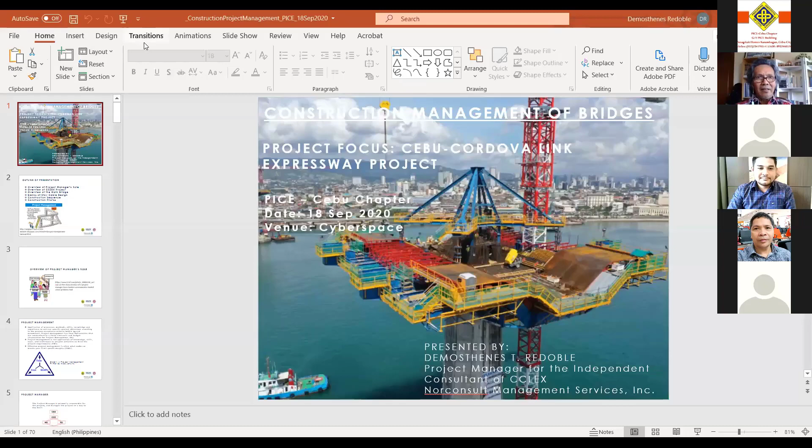Okay, so I have until 3 p.m. for my presentation, so I'll just time myself. Give me a few minutes. Sometimes when you enjoy talking you forget the time, and then the next speaker gets cut short. I'm also a friend of Mr. Fritz.

Okay, that's it. So in my previous presentation to civil engineering students, it went on too long, so I don't want to repeat the same mistake. Okay, there you go.

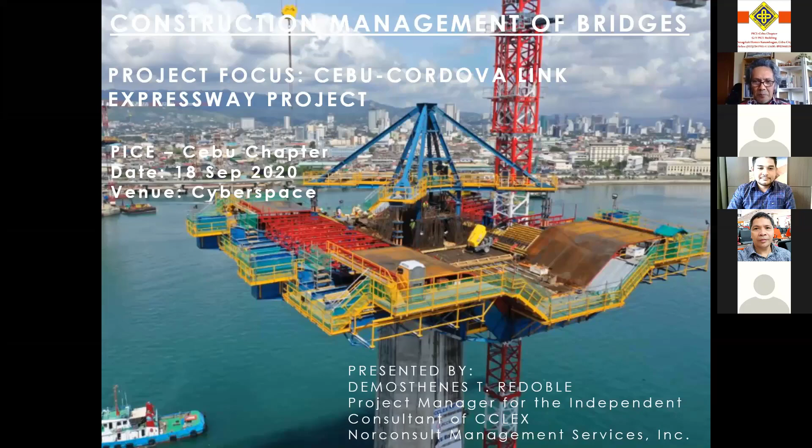So the next few slides will highlight what's going on at the Cebu-Cordova Link Expressway project. This is the overview of my presentation. First, I'll discuss the overview of the project manager's role, then the overview of the CCLEX project, then the overview of the main bridge, and then the basics of stay cable design. This structure is not taught in the academy, so I think everybody would welcome a few basic principles of cable stay design. Then the construction sequence of CCLEX, and then construction photos.

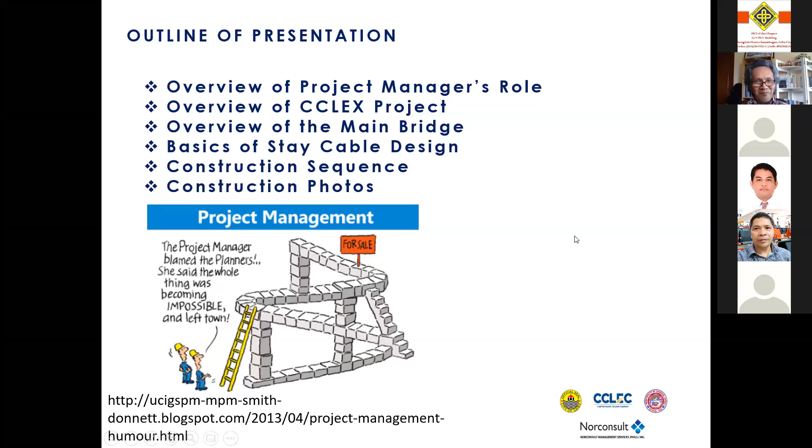By the way, thank you very much, Ma'am Edena, for your introduction. So the next few slides will be the overview of the project manager's role.

Let me read the definition of the role of a project manager from three certifying bodies: the Association for Project Management based in the UK, the Project Management Institute based in the US, and PSMJ, also based in the US. From the UK: application of processes, methods, skills, knowledge, and experience to achieve specific project objectives according to the project acceptance criteria within agreed parameters. Project management has final deliverables constrained to a finite time scale and budget. As a project manager, you do not deliver more, you do not deliver less—you deliver what is required within the timeline and within the agreed budget. From PMI: project management is the application of knowledge, skills, tools, and techniques to project activities to meet the project requirements—basically the same definition as the UK group.

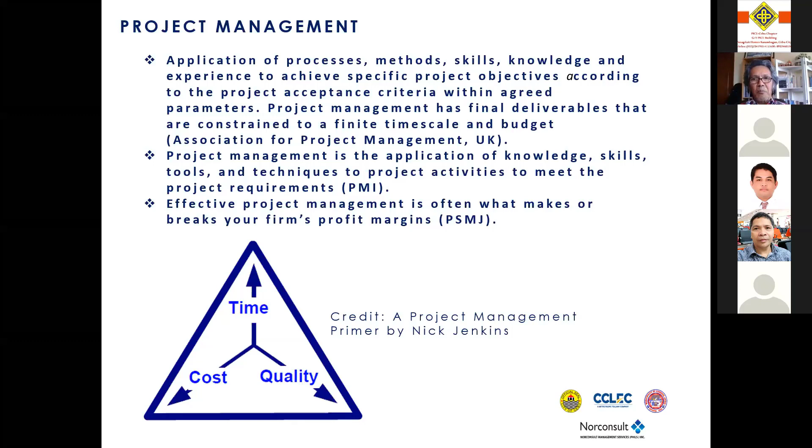If you are interested to pursue project management in the civil engineering profession, you have to go through some certifying bodies to make yourself marketable. So PICE has a certifying body.

To my recollection, we have four in the PICE group: structural, water, construction, as well as project management. I'm not sure if there have been changes, but I'm quite sure project management is one of those. So you approach PICE, disclose that you want to be certified, and probably you will have requirements the same way as a certified structural engineer.

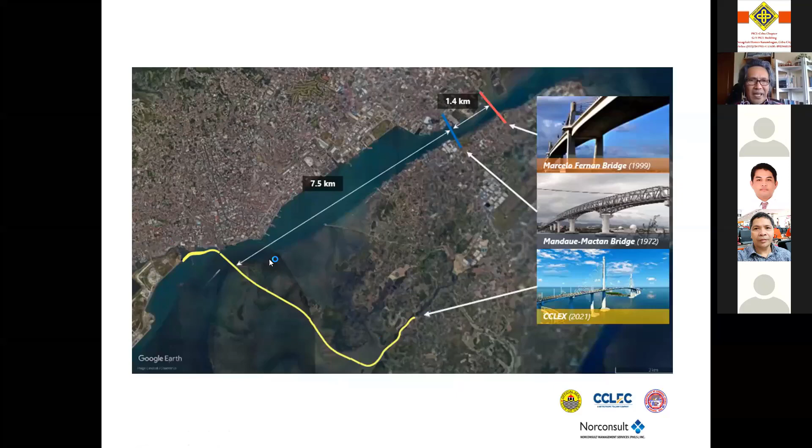I will not waste time on this one because time is very important. It might be good to summarize the lengths.

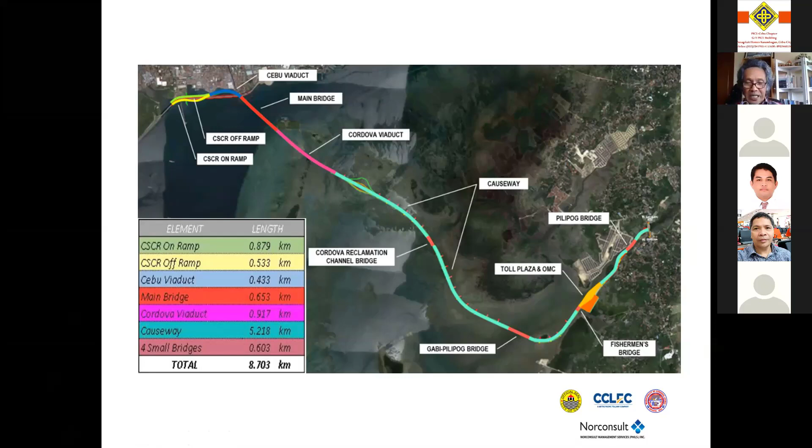By the way, the basis of calculating the toll is the length of the project, and that has been agreed by the LGUs and CCLEX. These are the iconic features of the third bridge.

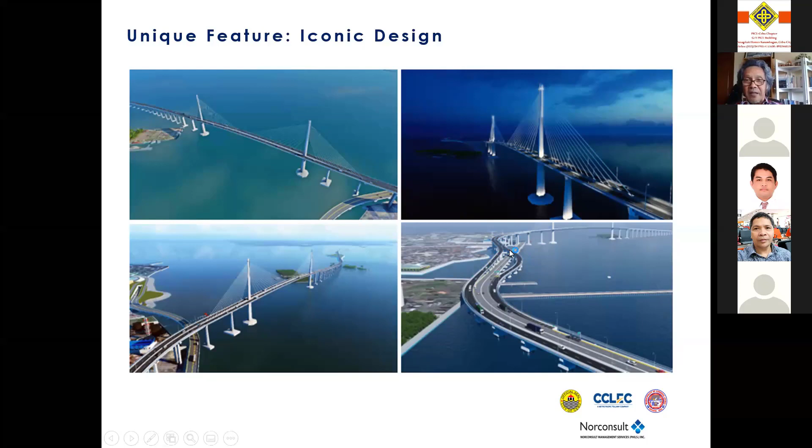So I think my pace is not so slow and I hope it's not so fast. I want to cover as much as possible.

One of the unique features of this bridge is an illuminated cross. Again, because Cebu is the birthplace of Christianity in the southeast, this is emphasized as part of the branding. So at night you will see the illuminated cross.

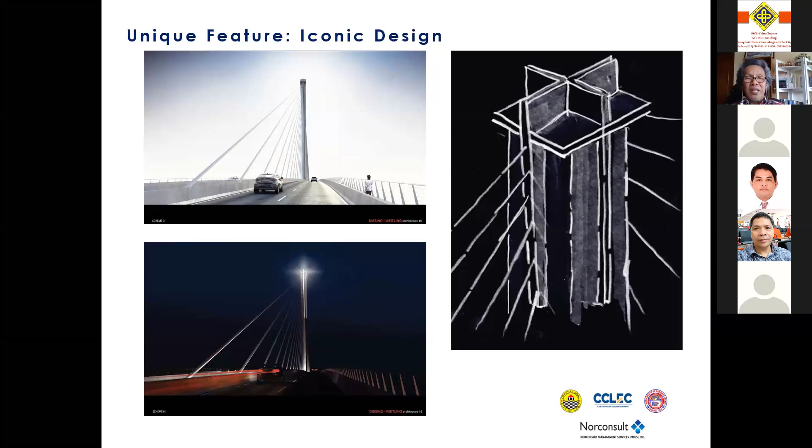One of the unique features of this project is the use of international design standards. I think this is always needed in all big projects, especially when our main reference is lacking to cover all aspects.

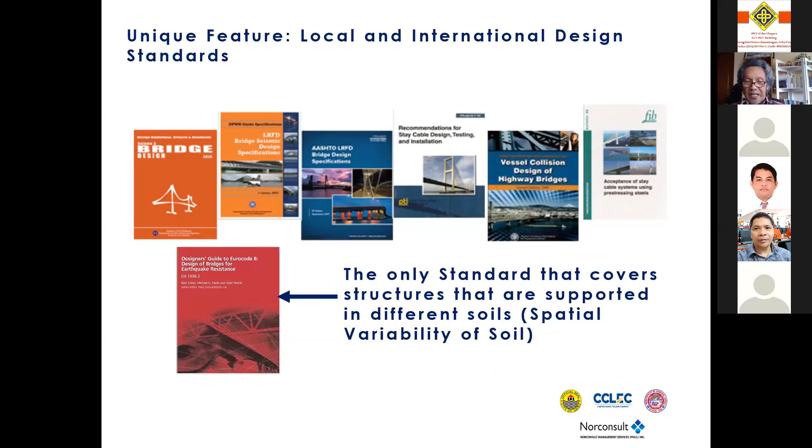So here's the breakdown of the designers. One of the unique features of this is that there are many international designers.

For the main bridge design, that was Carlos Casado, based in Madrid. For other structures, the on-ramp, off-ramp, and the Cordova Viaduct, that was Sener.

For the geotechnical and foundation work, the analysis of the tall piles, it was carried out by a company based in Australia. This GHD is a very big company in Australia.

I came across GHD when I was seconded in Australia in the middle of 2000. I met them there, and they have a very big office in Manila, and they just recently moved to Cebu. I'm not sure if their Cebu office was affected by the pandemic. They are looking for expansion here in the Philippines.

The seismic study, which is a key element of the design, was carried out by a specialist based in the US. Look up NV5, you'll find this company is publicly listed. They are quite big. They performed the seismic analysis and came up with the response spectrum or response spectra to be used in the design of the structures.

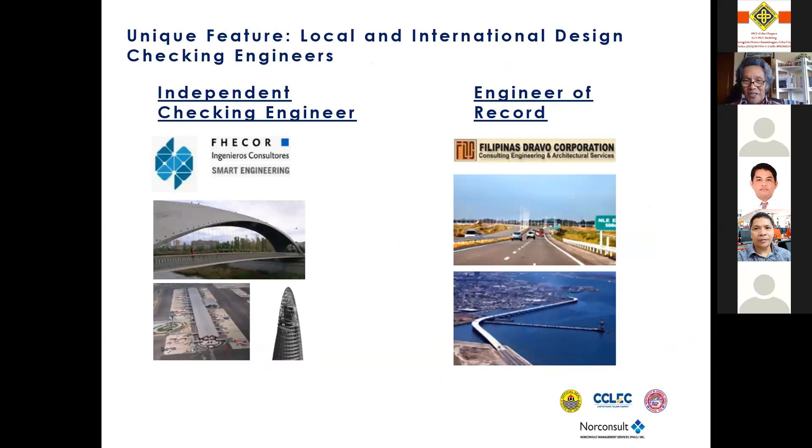The employer's engineer, composed of COWI and DCCD, is basically the technical arm of CCLEC. They give directions to CLJV. Nobody can give directions or instructions to CLJV except the employer's engineer. That is a requirement of the contract, both in design and construction.

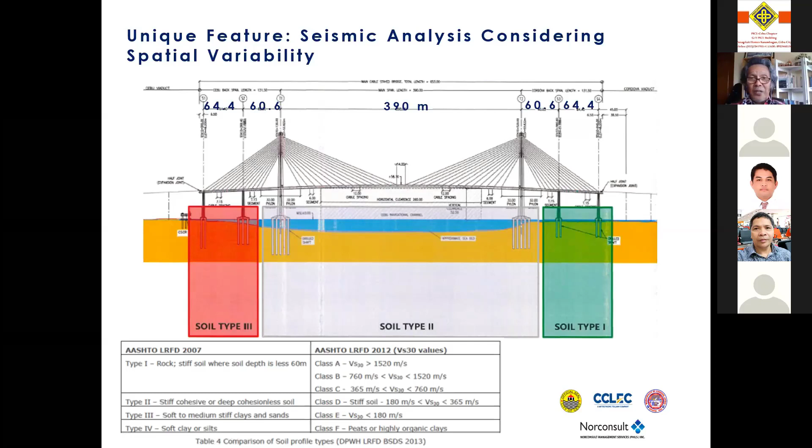Let me explain this a bit, the graph here. First, I'd like to inform everybody that this CCLEX project is designed based on 2 levels of earthquake.

Level 1 has a 100-year return period, and Level 2 has a 1,000-year return period. By comparison, I think, if I still remember correctly, the return period of the design earthquake for ASEP is 50 years. I'm not sure if that has been updated, but I remember it being a 50-year return period. The longer the return period used for design, the stronger the peak ground acceleration.

So that's the bottom line. CCLEX is classified as a critical bridge, this is its operational classification.

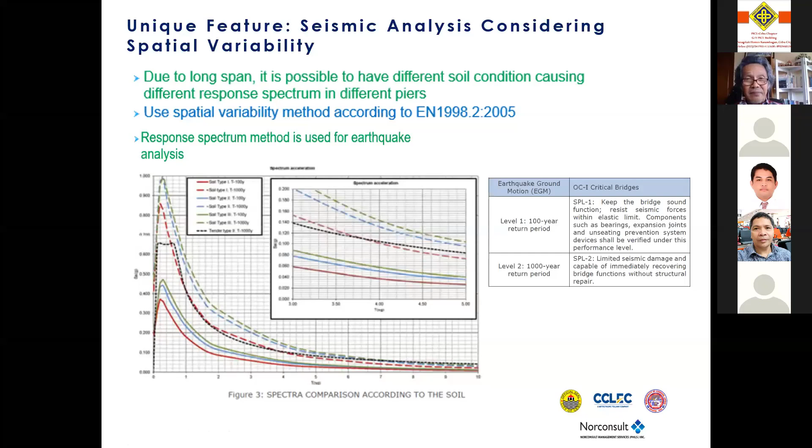Another point is the clearance of the old bridge is just about 24 meters, if I'm not wrong. So very large vessels cannot pass through. When I say very large vessels, these are Panamax ships with a deadweight tonnage of about 80,000 tons.

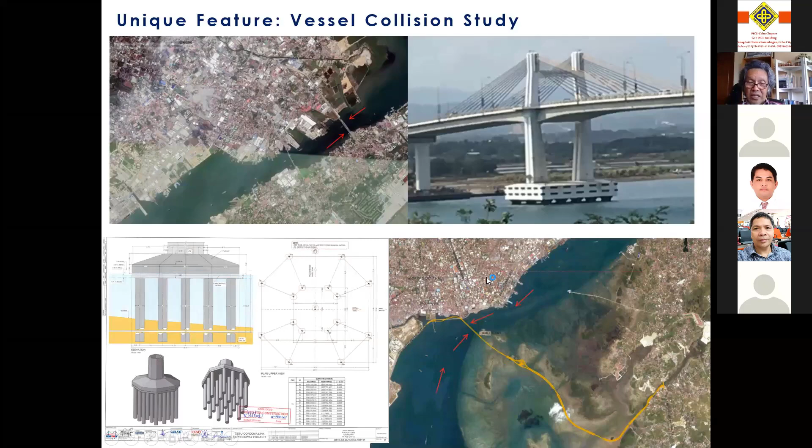The second bridge was not selected, and I was one of those engineers at Katahira. It's not because of oversight, but look at the history of vessel collisions. In 1980, the FS for this second bridge started, I think about 1980, and it was implemented by 1995.

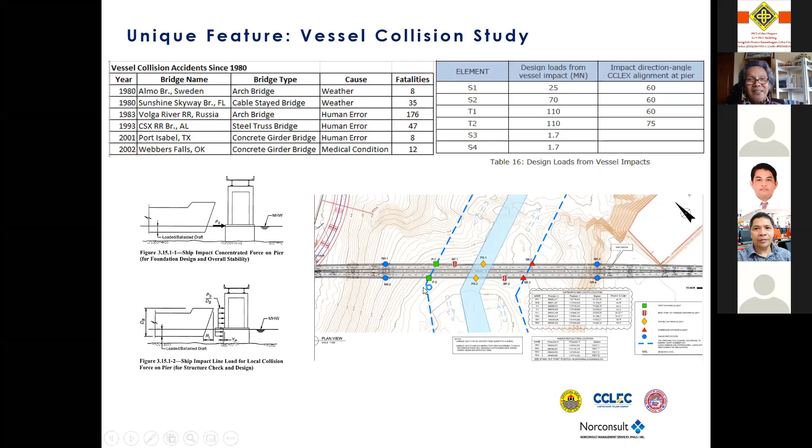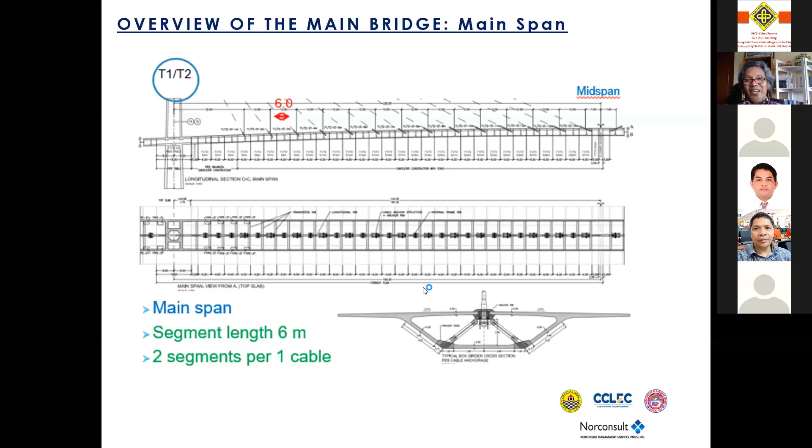Okay. This bridge is just unfortunate in that it's not a balanced cantilever, no? Its main span is very long but its backspan is very short. The main span is long, and the combined backspan is just about 120.

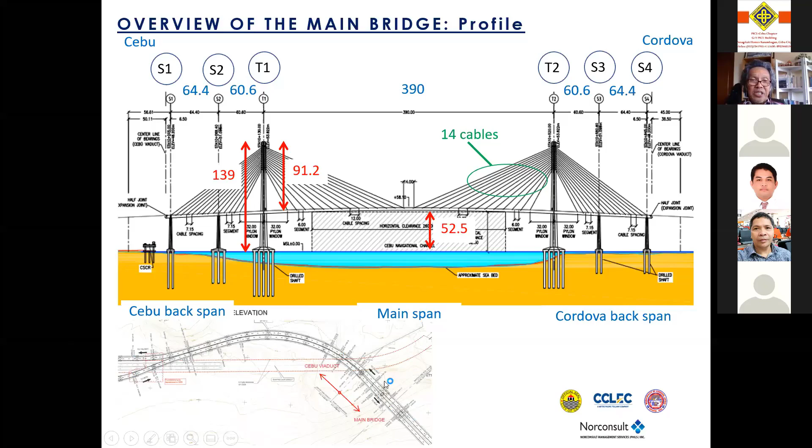So the alignment of CCLEX goes from the main bridge starting at Cordova, curves toward SM, then toward the existing CSCR, so you can't continue straight. That's why you don't have any opportunity to have a balanced cantilever. If the alignment were straight, that would be ideal, you would use a balanced cantilever. But because of its peculiar alignment, a balanced cantilever isn't feasible. I hope I've explained that.

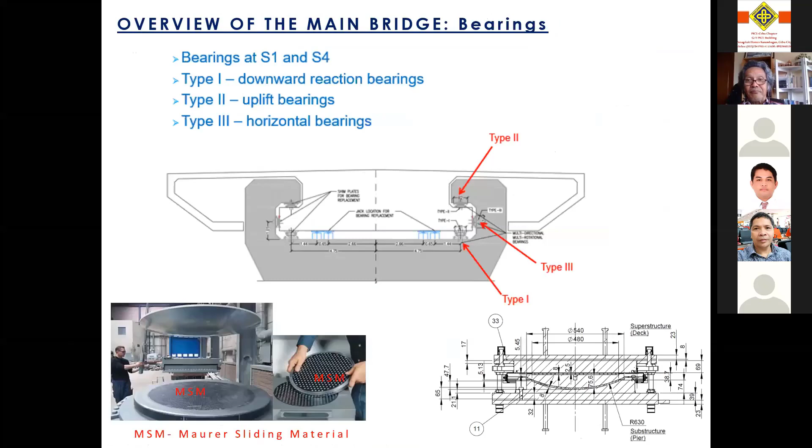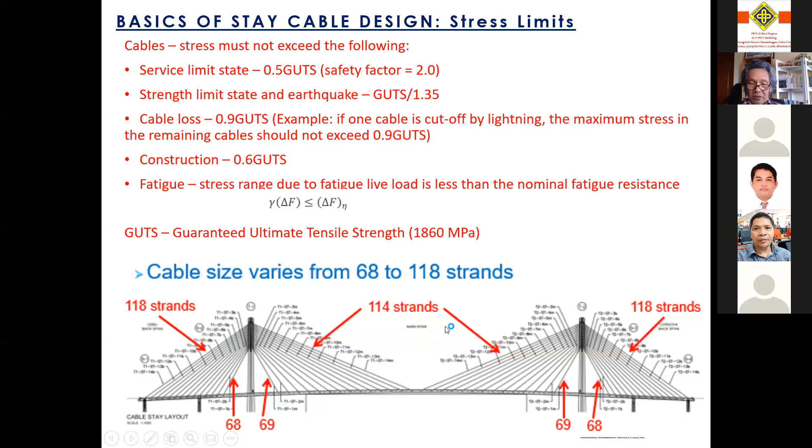So there are 114 strands here, then 118 strands going outward: 68, 69, 69, 68 strands. The more strands, the greater the force, so logic tells us the unit force is very large because the inclination of the cable is almost horizontal, making it less efficient. So it has to have more force, and that force can only be achieved with more strands.

This is the pier table, constructed using traditional support. From the pier table, cantilever construction proceeds to the left or to the right. This is the main span on the right, this is the main span as far as T1 is concerned, and this is the back span.

Okay, let's take a look at one cable. This cable, F1Z, how do you initiate the design of this? Okay, take a look at this one. The construction here was segmental: 1, 2, 3, 4, 5.

This dimension 6, times 2, that's 12. You can calculate the weight of the segment that will be supported by the cable. I think that's very, very clear, because once you know the weight supported by the cable, and you know the inclination of the cable, it's easy to solve.

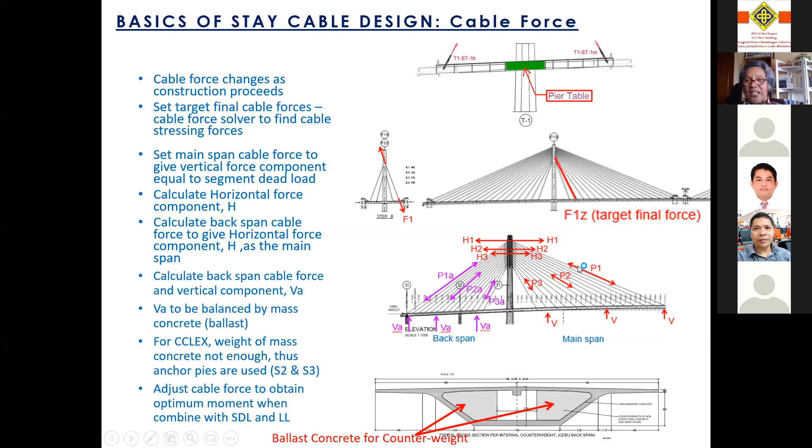The thickness is about 0.7 meters thick on top to develop load transfer, keeping in mind that the horizontal component of this needs to equal the horizontal component for equilibrium, and then you'll be able to calculate the ballast on the backspan.

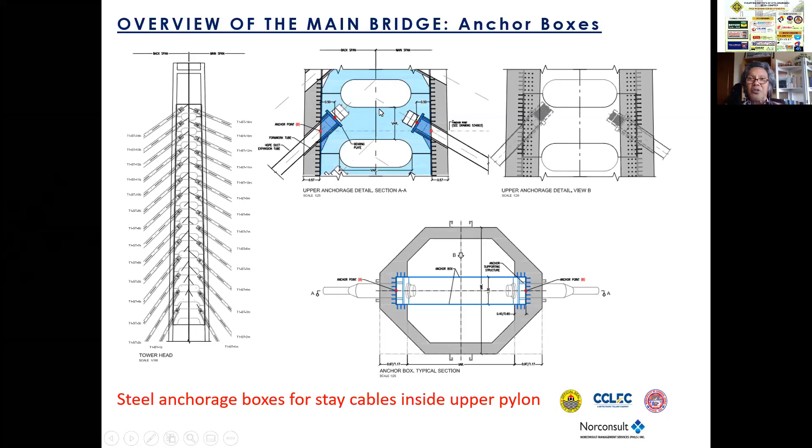Actually, it's a steel frame. So this is the steel frame. It has no continuity, so there's a gap for each set of cables. Okay, so that was that picture, that picture.